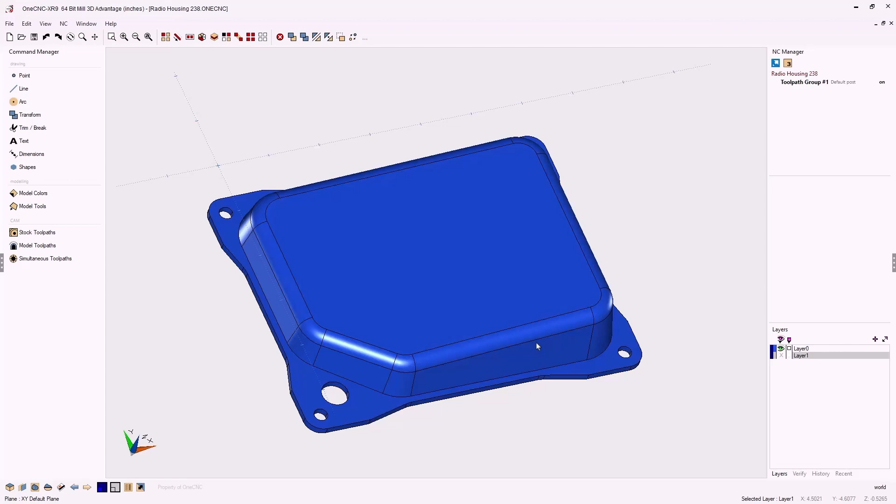To provide this type of training, let's first load a 3D solid model. I'm going to clear the screen and start from scratch. Let's head up to the upper left-hand corner, select Open, and load a step file. I'll select the Step option and double click on the step file. Use the default, Read Surfaces and Solids, and click OK. Once the import's completed, click OK one more time. And there we go, there's our solid model.

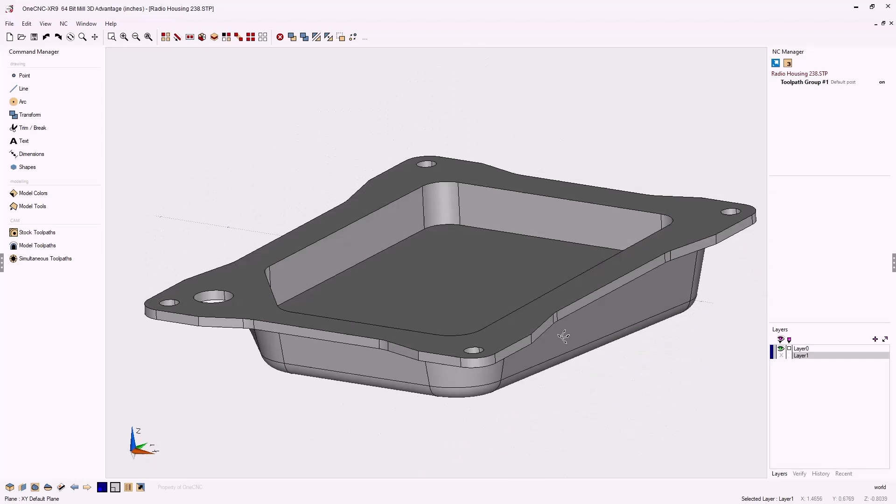OneCNC has also performed an automatic zoom extents so we can better take a look at the solid model. The next step is to properly orientate or rotate the part so that it's in the proper position for us to apply the toolpath.

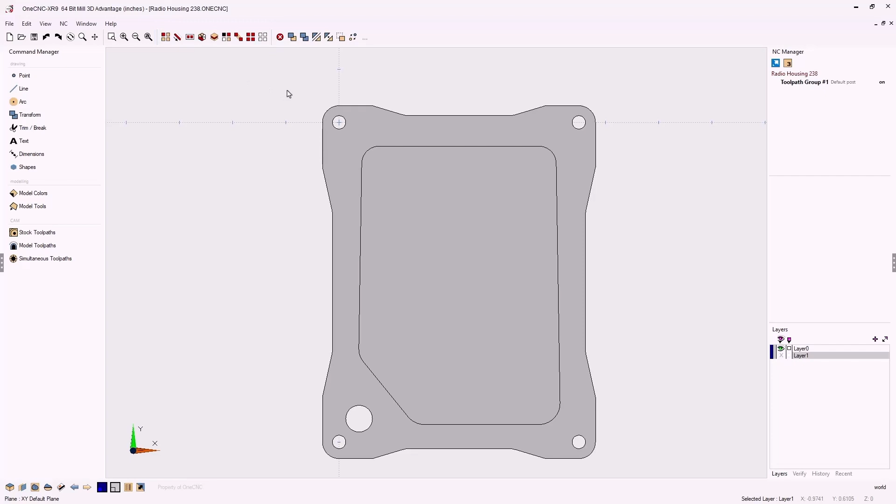The first thing we need to do is select the geometry. You can use any of the selection tools at the top of the screen, or use my favorite shortcut, Control-A on the keyboard. Once the geometry has been selected, we'll activate the Rotate command by heading up to the top of the screen and clicking Rotate. The first thing OneCNC wants us to do is select the origin to rotate around. We're going to be rotating around X0, Y0, Z0, so I'll just click OK.

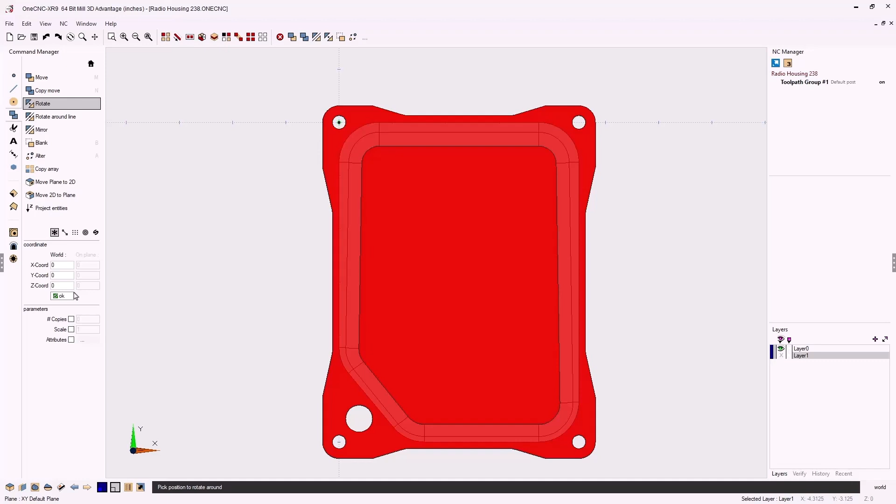If I take my cursor into the graphics area, we can see we have a digital compass, and it's easy to snap the angle we'd like to rotate. I just want to rotate 90 degrees, so I'll left click. That looks great. I'm going to pan down just a little bit.

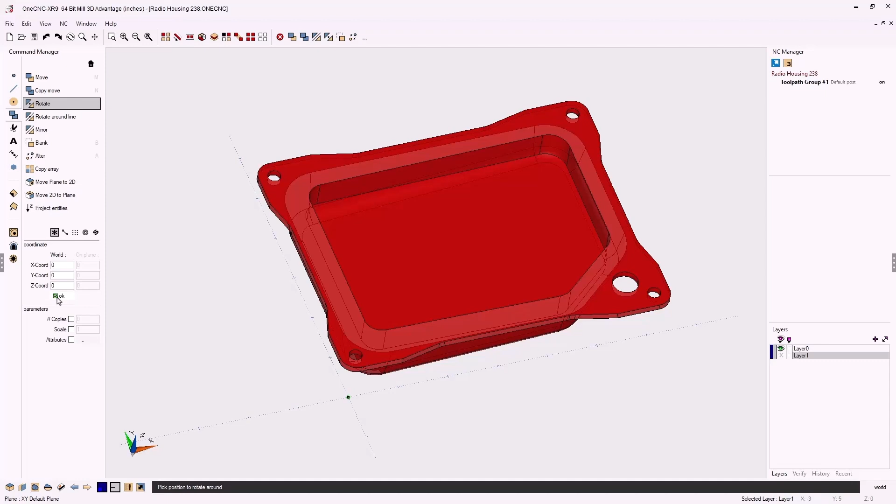Now I want to flip the part over, so I'll go back into the Rotate command. Again we'll use X0, Y0, Z0 as the location to rotate around, and click OK. But now I'm going to rotate around the X-axis. Down here where it says Rotation X, I'll type in 180 degrees. That looks good, so let's click OK. I'm going to pan the view up just a little bit so we can see the part better.

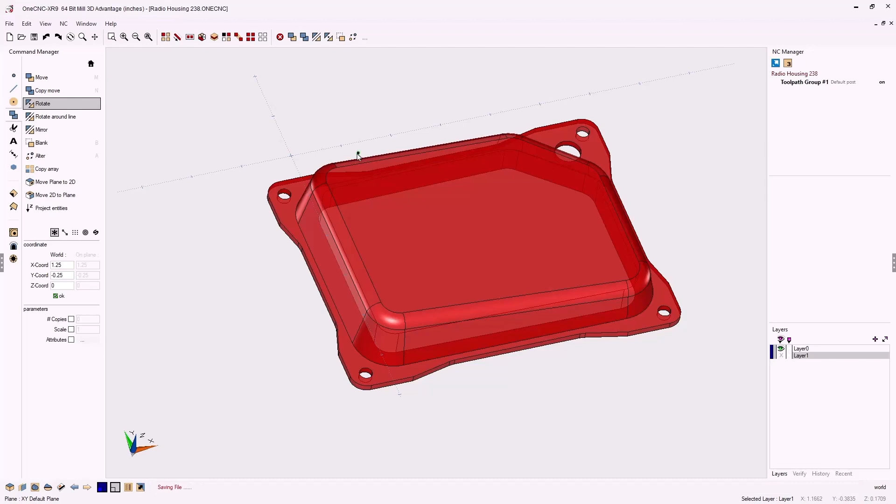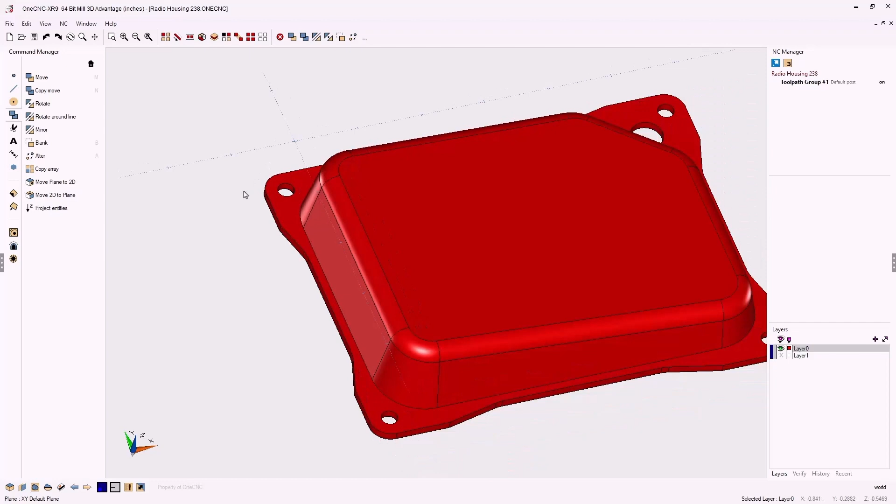Now that we have the part properly rotated, the next step is to position it exactly where we want. When we move geometry, we can grab it by a vertice or a point, but in this example I want a bit more control. For example, I might want to move the part so the center of the hole is at X0, Y0, Z0, or so the theoretical intersection of this edge and this edge is at X0, Y0, Z0. We can easily do that by extracting wireframe geometry from our solid model.

In fact, anytime you want to apply a 2.5-axis toolpath, let me demonstrate. If we head over here, these are all 2.5-axis toolpaths, and these types of machining operations require wireframe geometry. So not only can you use wireframe geometry to position the part, you'll also need it to apply this type of toolpath. So how do we extract wireframe geometry?

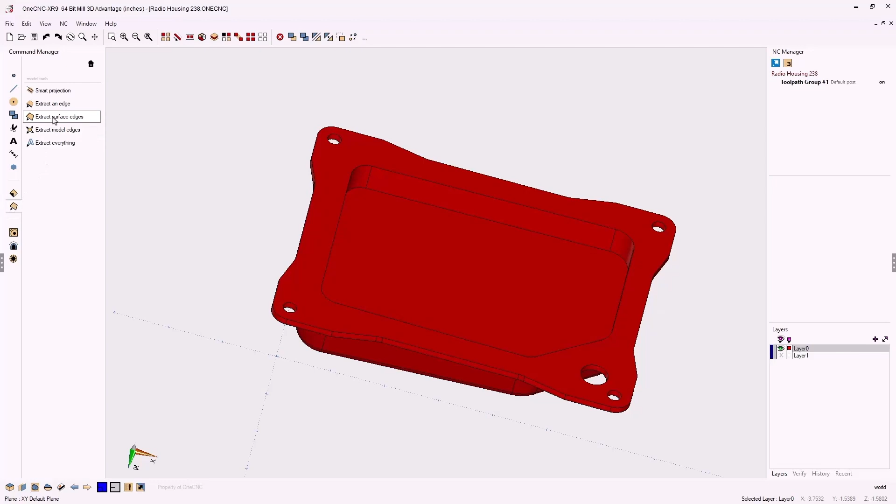Let me do something first. Let me come down to the color palette. I'm going to change the color and also the line thickness so we can see the wireframe geometry a little better. I think that looks good. Let's head back over to the Command Manager and select our model tools. Now let's select this option called Extract Surface Edges. I can take my cursor, hover over the face of the solid model right here, left click, and then right-hand mouse click, and you can see OneCNC has easily created that wireframe geometry.

I can use that wireframe geometry to help position the part. Let's rotate the view around a little bit. Just by looking at the model, I'm also going to want some wireframe geometry at the base of this boss, because I think I'll want to apply a profile operation, a 2.5-axis profile operation, at the base of this boss.

So let's head back over to the command manager, and instead of using Extract Surface Edges, let's use Extract an Edge. That way I can just left click the edge and OneCNC will create the wireframe geometry along all the tangent edges. Very nice. I'm going to right-hand mouse click.

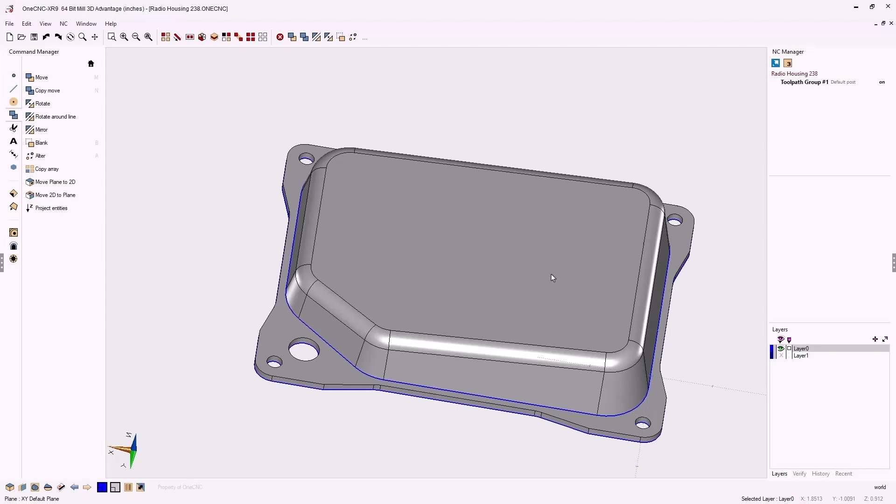If I rotate this back and forwards, you can see how easy it is to create that wireframe geometry. Now, just like before, if we want to move geometry, we're going to need to select it first. I'll hit Control A to select everything, then the spacebar twice to go to a CAD view.

Let's take a look now at how we can use that wireframe geometry to move the part. I'm going to head to the top of the screen, select the Move command, and let's say we want to place the very center of that circle, that hole right there, and move it so that's at the origin. I can left click, take my cursor, and snap the origin just like that. What we're doing is actually just snapping the wireframe geometry that we created.

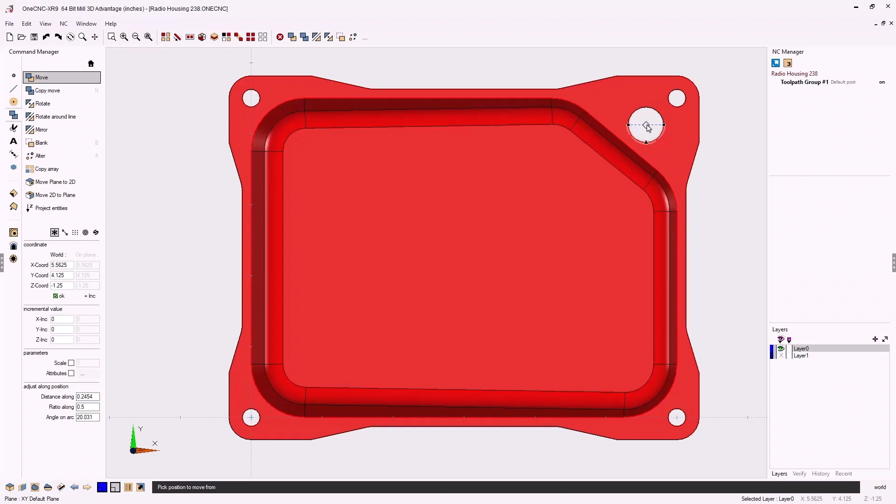What if we wanted to move the part so the center of the larger hole was at X0, Y0, Z0? Again, I can left click the center of that wireframe circle we created earlier, come down and snap the origin.

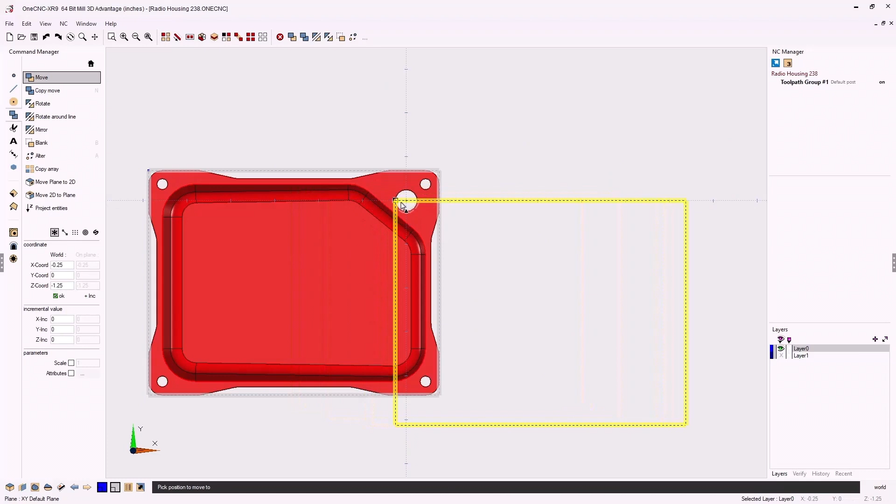Now let's take a look at moving the part by the theoretical intersection of two edges. Simply take your cursor, hover over both edges, then move your cursor to the theoretical intersection and left click. Now you can move the part by its theoretical intersection and snap the origin just like before.

I'm going to hit the spacebar twice to go to a CAD view, and now you can see that we have the part properly located with the origin in the upper right-hand corner.

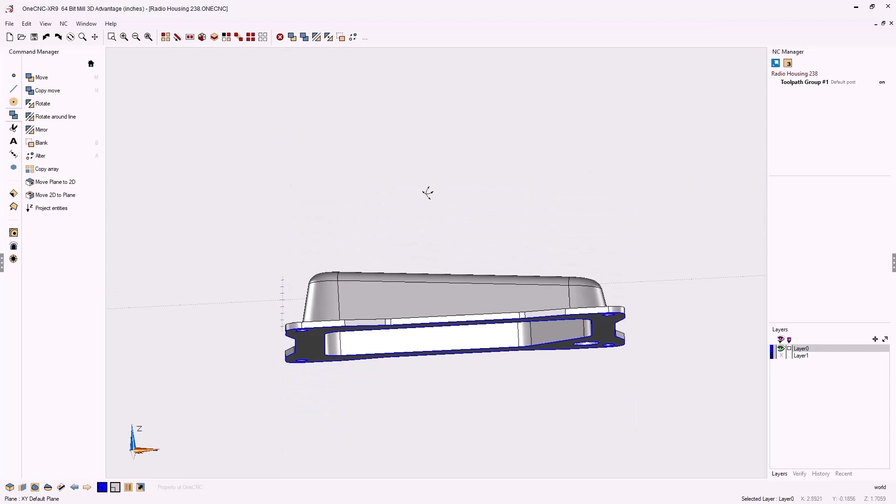Now, the next thing we need to do is start to think about how we're going to position and locate the part when applying toolpath to the other side of the part. In this example, we're going to flip the part and mount it on a tooling plate with dowel pins in the upper left and lower right hand corner of the part.

So why don't we use the upper left hand center of the hole, center of the dowel pin, as the X0, Y0, Z0. Now, for OneCNC to understand how we want to mount the part for the second operation and where we want the datum, the X0, Y0, Z0, we're going to need to create a construction plane.

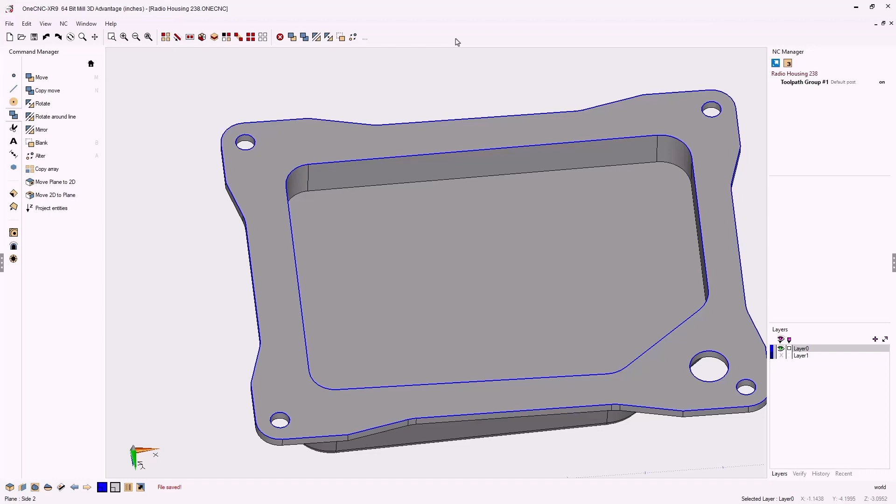So what I'm going to do is create a few points to help us create that construction plane. I'll head over to the command manager, go into our point tool, and all I'm going to do is just left click the center of both of those arcs to create 2 points.

Again, the reason why I did this is those 2 points are going to help us create the new construction plane. Let's head down into the construction plane tools in the lower left hand corner of the screen, and I'm going to use the option called Create Construction Plane through 3 points. So I'm going to select this option.

Now the first point that I select is going to be the X0, Y0, Z0 of the new construction plane, and that's exactly where I want to click. So I'll left click there. The second point I click is going to be the X positive direction of the new construction plane. And the last point I select can really be any one of these points along the edge up here. That's simply going to represent Y positive. So I'm going to left click just like that.

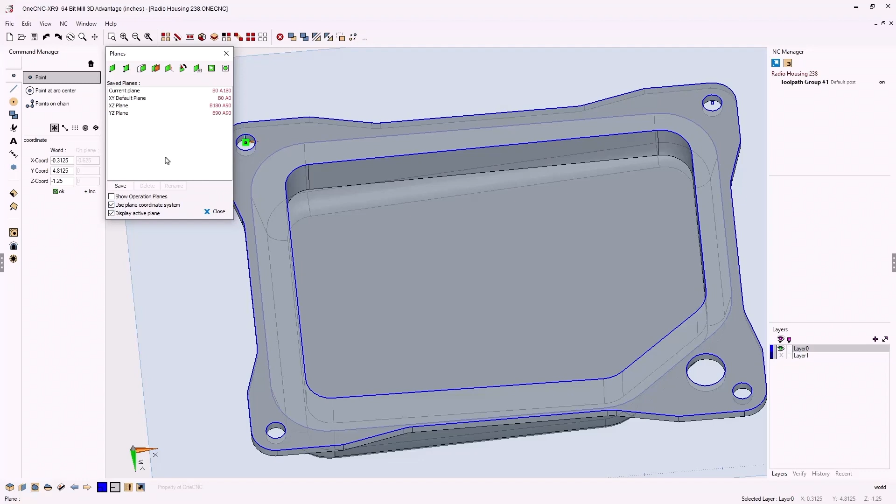So if I were to turn on the Display Active Plane option as well as the Use Plane Coordinate System option, you can now see that the axis gnomon is exactly where we want it. That's going to be the brand new construction plane, the brand new origin for when we start applying toolpath to the second side of the part.

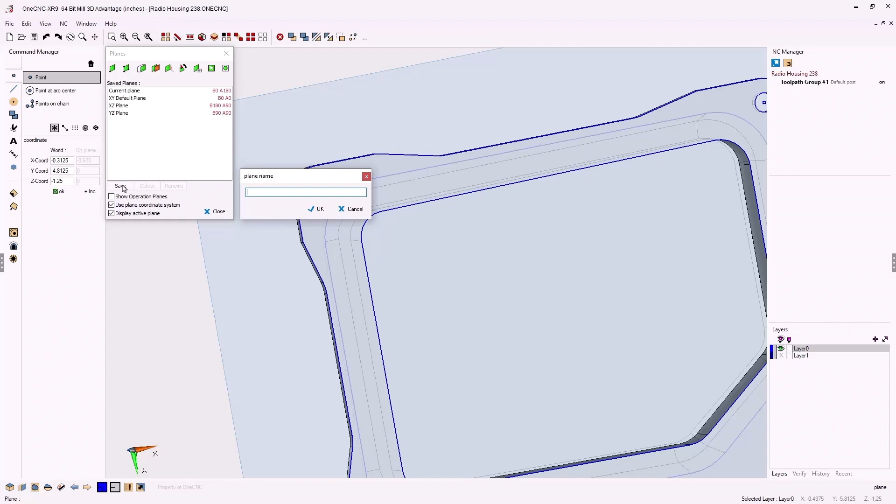Let's save this construction plane by clicking on Save, and we can give it any name that we want. I'm simply going to call it Side 2, just like that, and then we'll click OK.

All right, there's only one thing left to do, and that's to create some stock. Let's close the construction plane tools down, and I'm going to hit the spacebar twice, go to a CAD view, and for the stock, I'm just going to use a simple rectangle. Let's head back over to the command manager, select our line tools, and then rectangle.

Now, you can use coordinates if you'd like, but I'm simply going to just grid point snap. Just by taking my cursor, left clicking, and then I'm just going to drag down to the lower right and left click just like that.

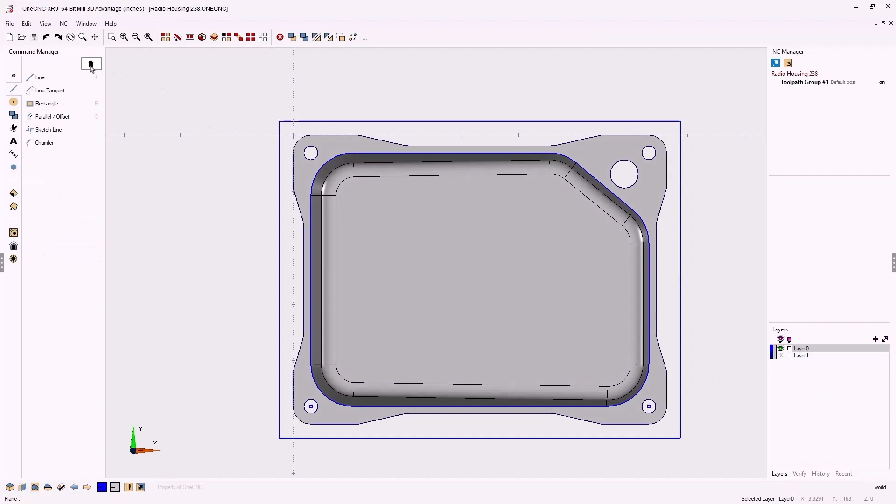All right, that's it for this training video. We took a look at loading the solid model, repositioning the solid model so that it was in the proper location. We also took a look at creating wireframe geometry. And then finally, we took a look at creating a brand new construction plane for when we applied toolpath to the second side of the part.